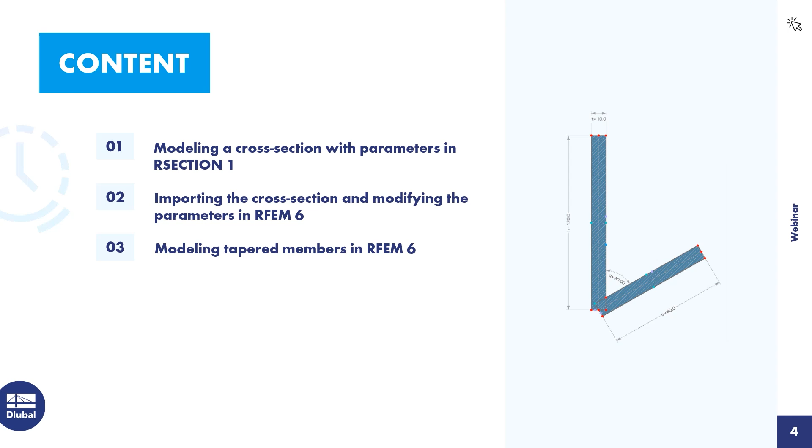I would like to demonstrate this using the example of an angle cross-section. The leg lengths and thicknesses, as well as the angle between the legs, should be able to be defined variably. First, I model the angle cross-section and then I define the dimensions using parameters. I first create the short leg via the graphical input of a single element. I choose here the input mode, length and direction.

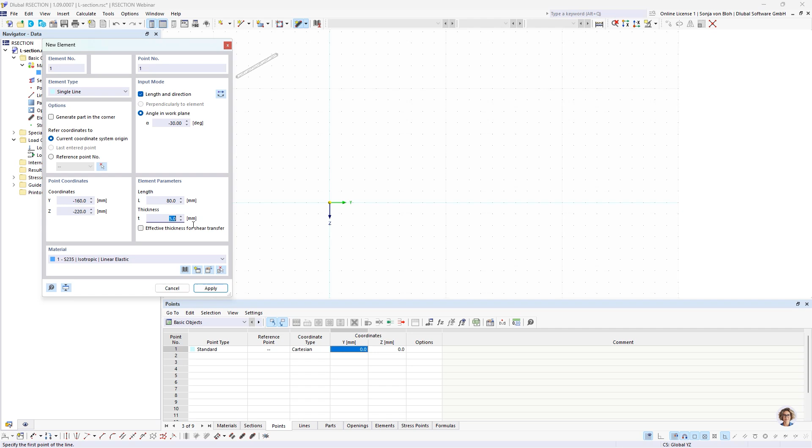The short leg has an angle of -30 degrees in work plane, a length of 80 millimeter and a thickness of 10 millimeter. The long leg has an angle of 90 degrees in work plane, a length of 120 millimeter, and also a thickness of 10 millimeter. To make placement easier, I reverse the element orientation.

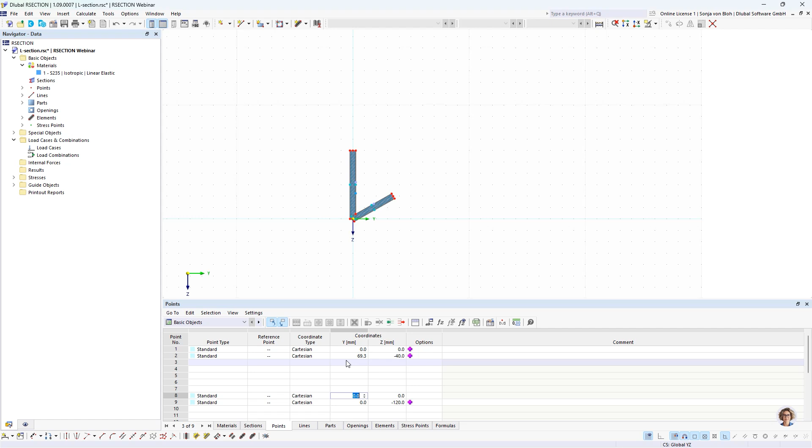Gaps have now appeared in the numbering. You can see this here in the table points. I eliminate these by automatically renumbering all objects. To do this, I first select the entire cross-section and then I choose Tools, Renumber Automatically.

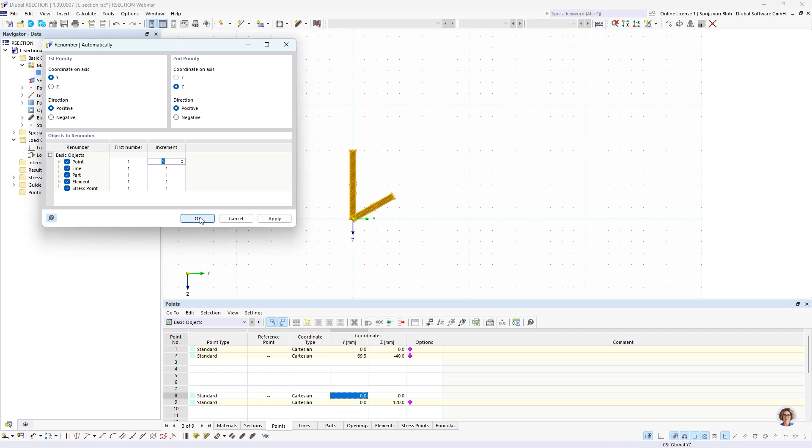In this dialog, you have the possibility to influence the sequence of the numbering as well as the first number and the increment of the numbering. I click here on OK and the objects will be renumbered. I then dimension the cross-section.

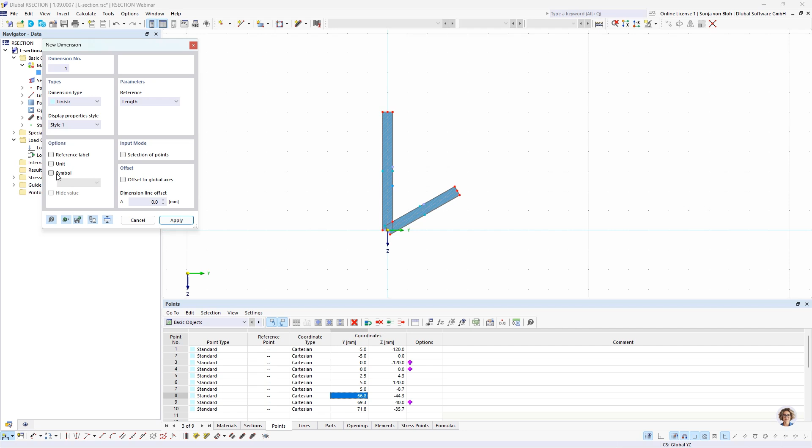I use a linear dimension to dimension the long leg. To do this, I choose here linear and I also assign a symbol to this dimension. This should have the symbol H. Then I pick here my 2 points and then I create my dimension.

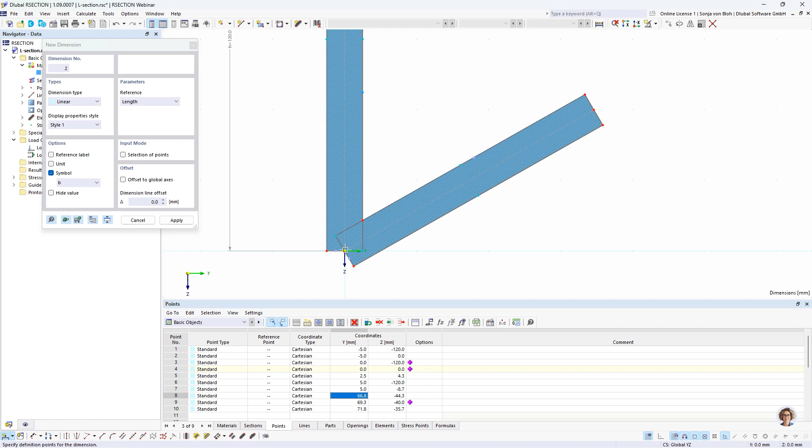I also want to dimension the short leg. This has the symbol B. I choose here the 2 points and create the dimension. Then I dimension the thickness T. I also want to dimension here the angle between the legs.

For this, I use the angular dimension, and I also want to assign a symbol to this dimension. The symbol should be alpha. For the symbols, you can also use HTML commands. The character alpha is displayed with &alpha;. Then I pick the corresponding lines to create my dimension.

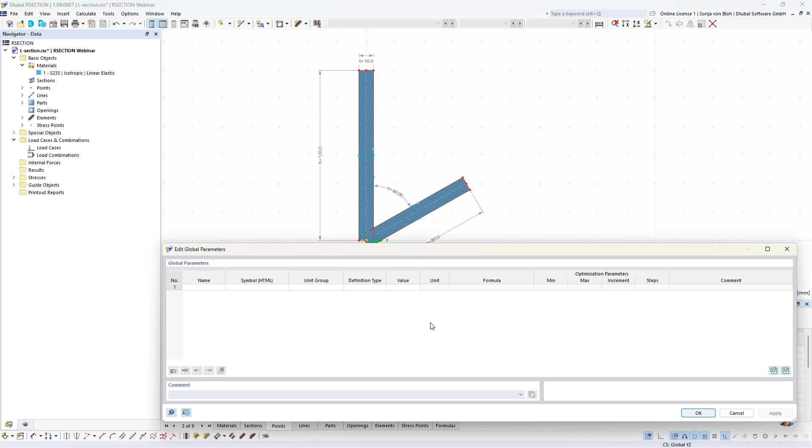Now the global parameters have to be defined. For this, I open the dialog via the button in the table. Each table row manages a parameter. It's necessary for the name of a parameter to consist of ASCII characters and to be entered without spaces. The name is used to address the parameter in the formulas.

Each parameter name can only be assigned once. The unit group of the parameter must be selected from the list. This determines whether the parameter represents a length or an angle and so on.

The definition type controls whether the parameter is described by a value or a formula. Depending on your selection, you can enter the value or the formula in the following columns. So if you choose the definition type value, I can enter the value directly here in this cell. If I choose the definition type formula, then I have to define the formula with which the value is then

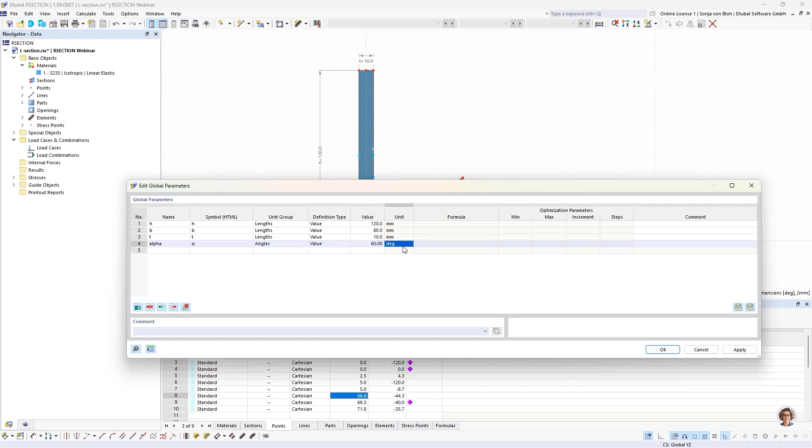I then create the parameter t for the thickness of the section, also from unit group length, definition type value, and it is 10 millimeters. For the angle, I define the parameter alpha. HTML commands can also be used for the symbols. So I define here &alpha; with a semicolon. The parameter alpha is from unit group angles, definition type value, and has the value 60 degrees. My global parameters are now complete, so I close this window with OK.

The coordinates of the points can now be defined via the parameters. You have the option of addressing objects and their properties directly. For example, you can access the coordinates of points. This is useful if you want to define the coordinates of a point in relation to another point. You can call up a list of object properties using the info button in the console. To open the console, I go to menu View, Console, and I click on this info button. This opens the object property list.

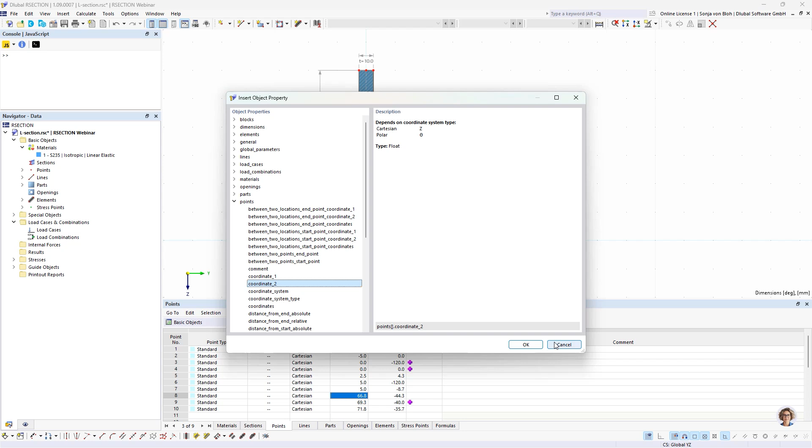You can access the previously mentioned coordinates of a point via the object's property points, coordinate 1 for the y coordinate or coordinate 2 for the z coordinate. Here in the brackets, you have to enter the point number from which you want to take the coordinate. I don't want to use this property, so I click on cancel. I set the parameter values so that they give the exact dimensions of the angle cross-section I just created. This gives me a way to check whether my functions are defined correctly.

The y coordinate of point 1, this point here, is minus t divided by 2. You can enter this function directly into the table. Just type equals minus t divided by 2. Alternatively, you can also enter the function using the Edit Formula button in the window. So I do this for the z coordinate. I open the Edit Formula window and the z coordinate is minus h. And with OK, I now have this formula assigned.

After entering the formula, you will see the yellow triangle in the table cell indicating that the formula has been stored here. You can choose whether you want to display the values or the functions. To do this, just click on this button, Show Formulas, to see the formulas or the values. Point 2 is defined by the functions in y direction equals minus t divided by 2, and 0. Point number 3 is 0 and minus h. Point 4 is the 0 point, so I have nothing to do.

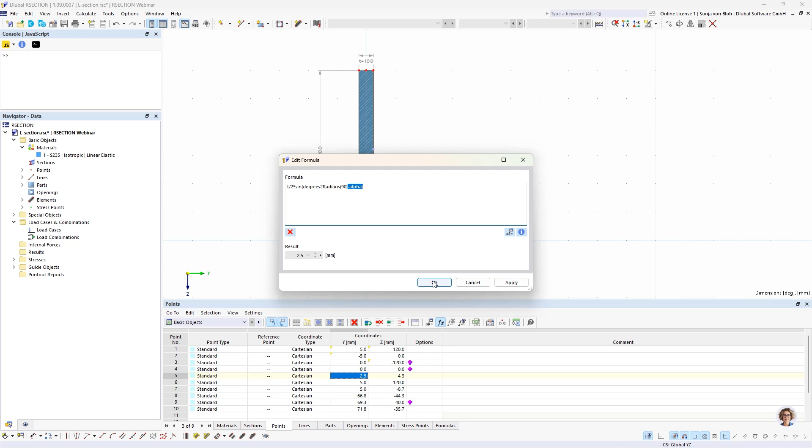The parameter alpha here is automatically used in the correct unit, so it does not have to be converted. So then I click on OK. I copy the remaining formulas from a prepared file. The point coordinates are now all defined using parameters. Now only the thickness needs to be defined using the parameter t. I define this using the elements table, and here I define for each element the parameter t.

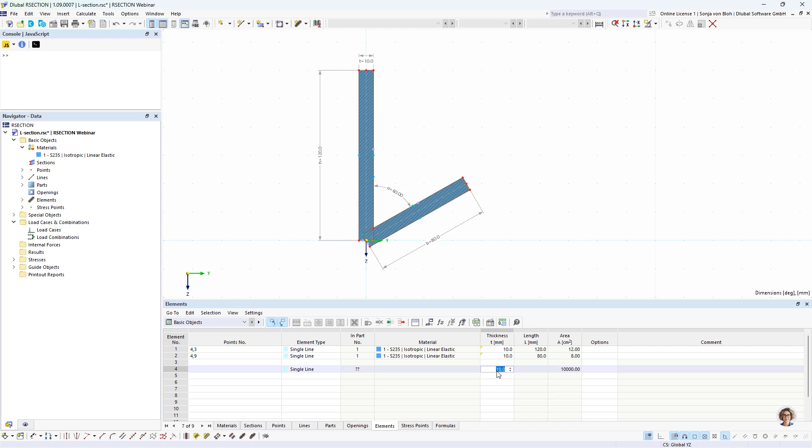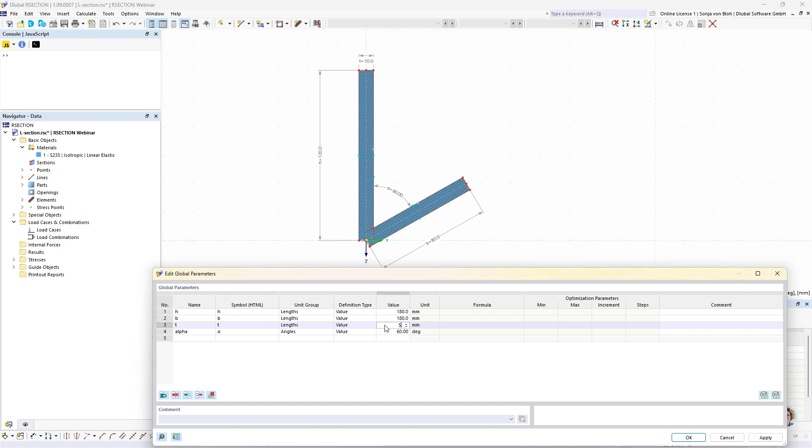The cross-section is now completely defined by parameters. By changing the values in the global parameters, you can now adjust the dimensions of the cross-section and thus create any cross-section in the series. To demonstrate this, I open the global parameters and change the parameters. For example, h to 180 millimeters, also for b, t should be 5 millimeters, and alpha should be 30 degrees. If I click on OK, the cross-section will be modified. You can use the created cross-section in RFEM. To do this, I first save the cross-section in RSECTION, and then I switch to RFEM.

I have already created a file here. You can now import the cross-section you have just created. I import the section via Navigator Data, New Section. I open the section library from RSECTION. I choose here this cross-section and I click on OK.

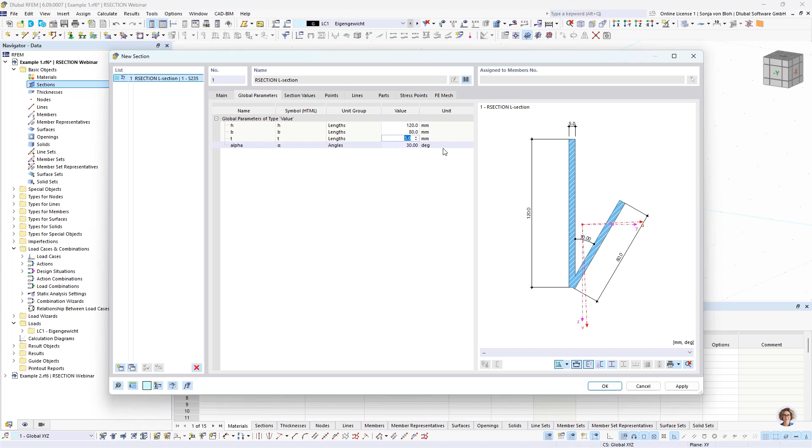The global parameters of the cross-section defined in RSECTION are now listed in the Global Parameters tab. You have the option of adjusting the values of the parameters. I will do this. I change here the parameter H to 120 millimeter, B to 80 millimeter, T to 10 millimeter, and alpha to 60 degree.

You can also create tapered members using the RSECTION cross-section. The initial cross-section should be the section I just created here. The final cross-section should have a larger leg height of 180 millimeter than the initial cross-section. To do this, I copy the RSECTION cross-section, and then I just change here the length of this parameter to 180 millimeter.

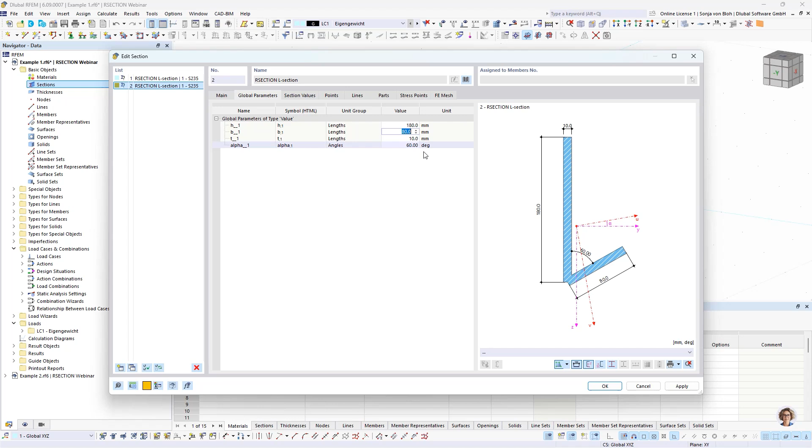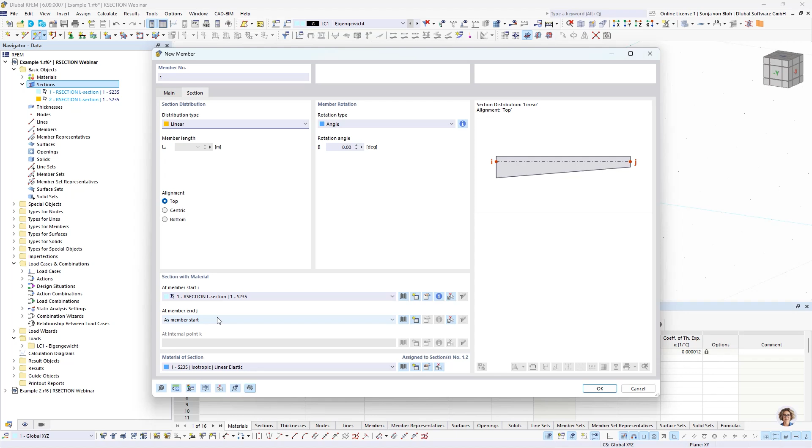I now create a new single member. In the Section tab, I choose here the distribution type linear. And for the member start, I select my first cross-section. For the member end, I select my second cross-section. Then I create my cross-section. You can then check the correct modeling and the rendering.

The cross-section could only be interpolated if the cross-section change is displayed as a linear distribution. This is the case here. Only in this case, a design in the design add-ons is possible. It is important to note that the angle difference between the cross-section parts must not be greater than 0.1 radians. This means 5.7 degrees for both RSECTION cross-sections and database cross-sections.

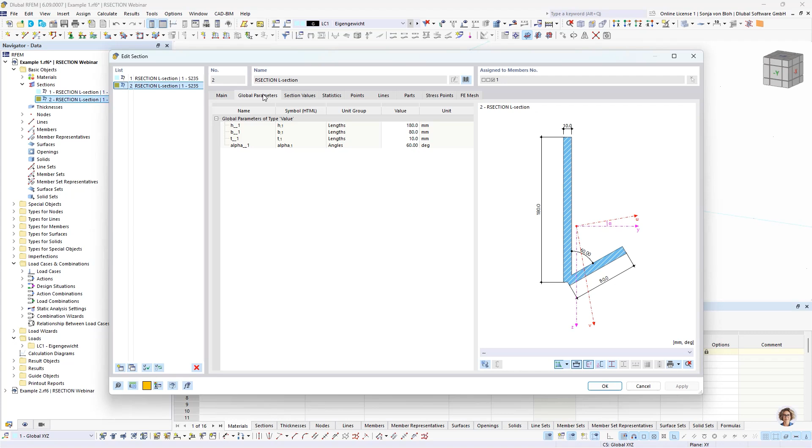To demonstrate this, I will change the angle of the final cross-section to 90 degrees. So I will do this. I change here this global parameter to 90 degrees. And now the angle difference is greater than 0.1 radians. So if I click on OK, the rendering will no longer show a linear distribution, and the design in the design add-ons would not be possible for this member. The reason is that you want to avoid cross-section parts that are not flat.

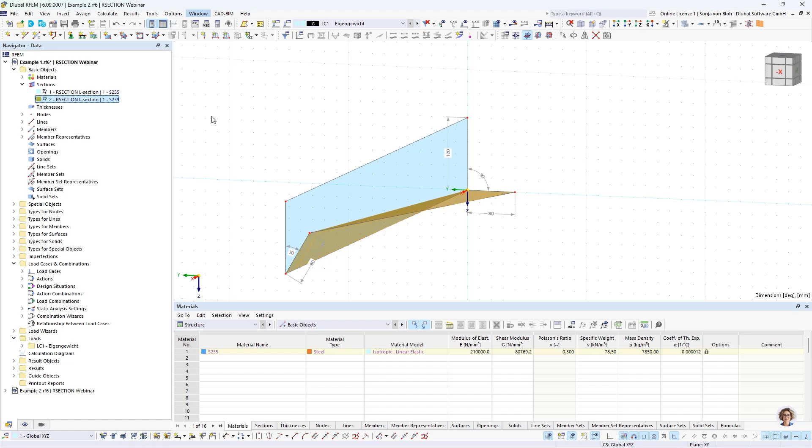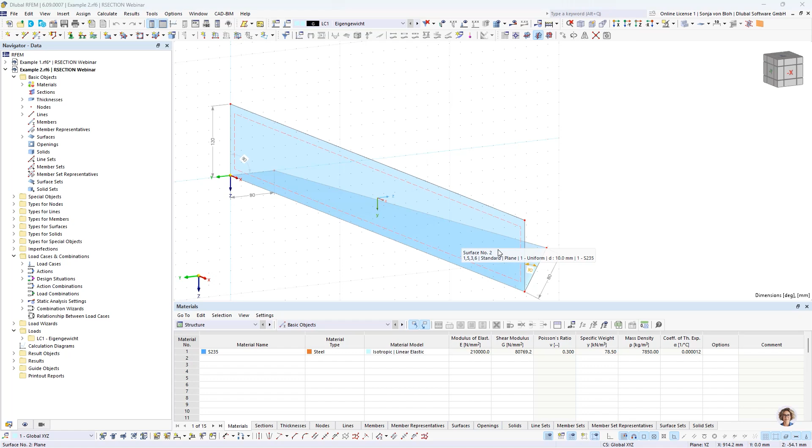To illustrate this, I have created such a member as a surface model. I will open this here. The cross-sections have the dimensions 120 millimeter and 80 millimeter. However, the initial cross-section has an angle of 90 degrees and the final cross-section has an angle of 30 degrees. This means the angle difference is 60 degrees, and this is greater than this 5.7 degrees. The surface of the short leg, you can see this here, is now no longer flat.

You can also create tapered members with RSECTION cross-sections that are not defined by parameters. When modeling, it's important to note that the final cross-section must be a copy of the initial cross-section, and that no geometric objects such as points or elements may be added or deleted. I would like to show this with an example. For this, I switch to RSECTION again.

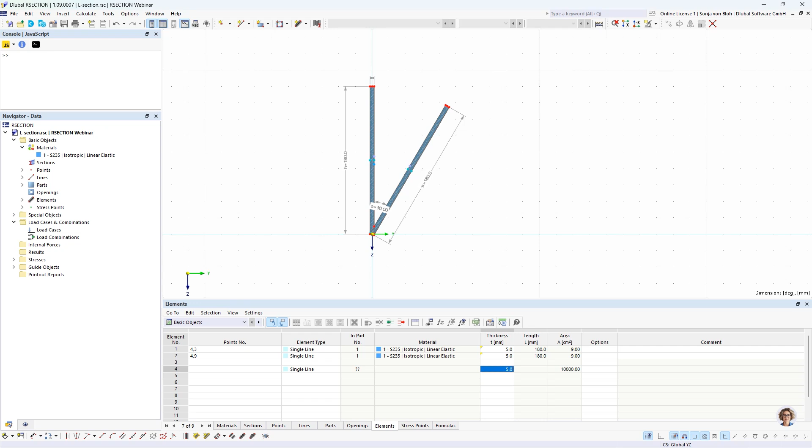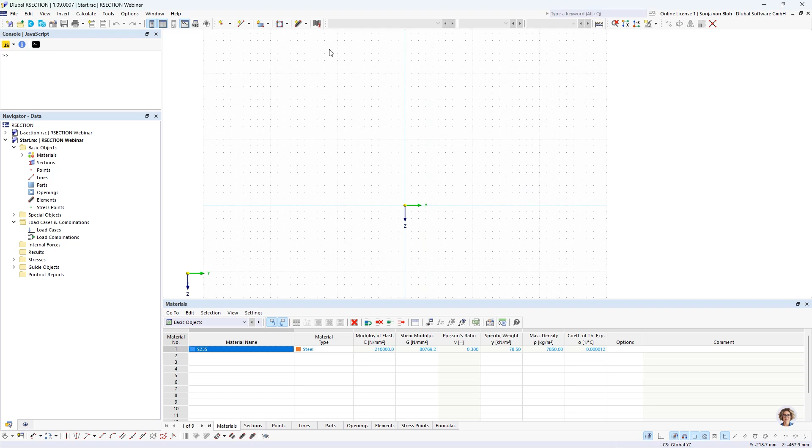First, I create the initial cross-section. To do this, I create a new file. It's my start cross-section. Analysis method is thin wall analysis. The initial cross-section is an angle cross-section with the dimension h 120 millimeter, thickness 10 millimeter, and for the other dimension it's 80 millimeter and also 10 millimeter. Then I save this cross-section.

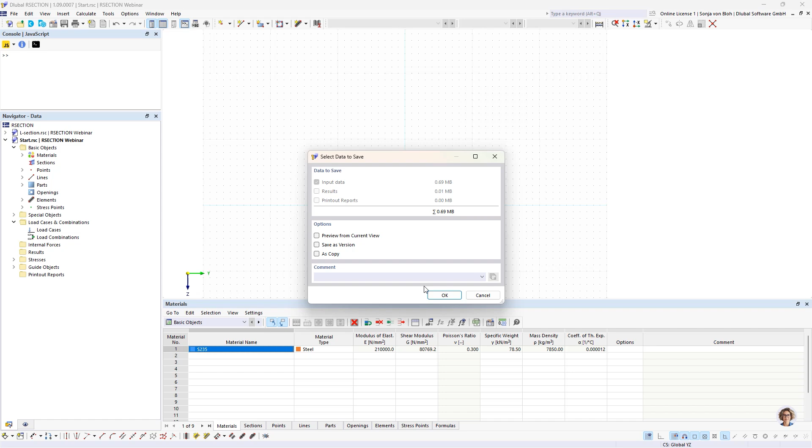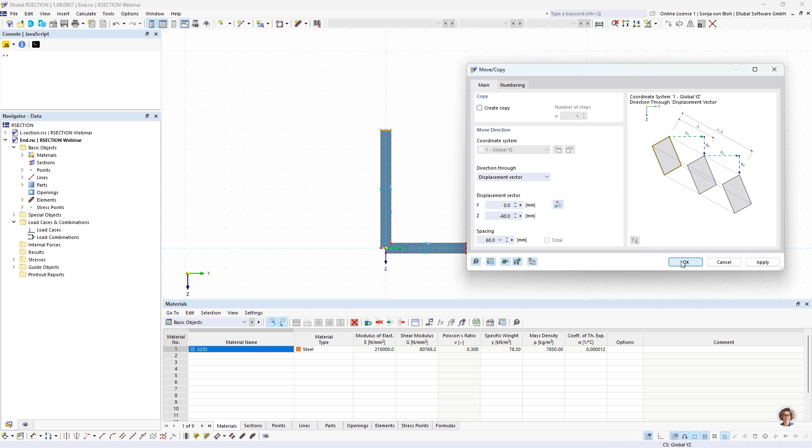I then create the final cross-section from the copy of the initial cross-section. To do this, I go here to File, Save As, and I enter here End, click on Save, and then I change the dimension H to 180 millimeter. To do this, I select here these nodes, and then I choose Move/Copy Selected Objects, and then I move these objects by minus 60 millimeters in Z direction. Then I save this file.

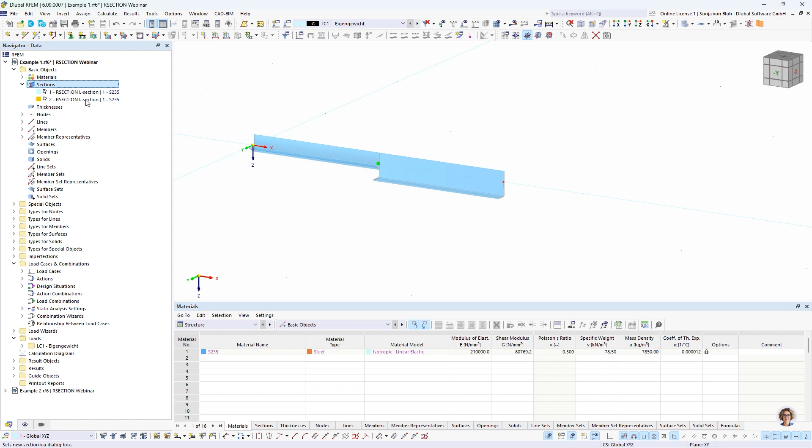I switch to RFEM again. I go to my first example, and then I import these two cross sections. So I go here to New Section, section library from RSECTION. Then I choose here start and end, click on OK. Then I have here my two cross sections.